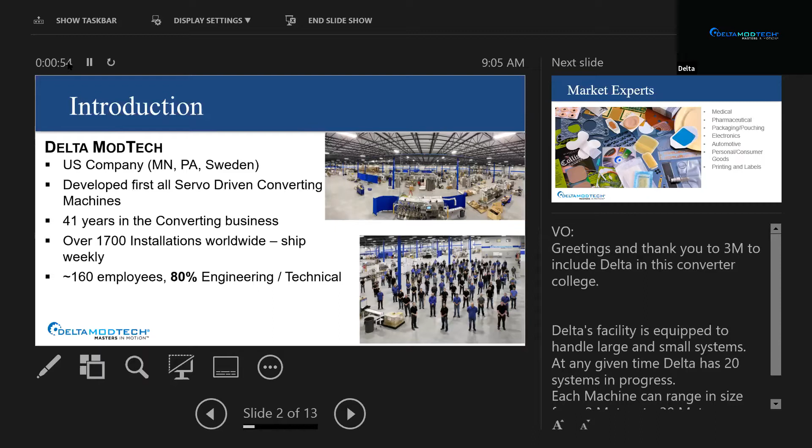These are some of the products. Now, bear in mind that because of the business that we're in, we're not able to disclose some of our customers' most confidential parts. But these are parts that you could find at your local Walmart and things like that. So that's why we were able to display these. But we design machines for the medical, pharmaceutical, packaging industry, electronic industry, automotive industry, and personal goods, printing and labels.

Some of the new emerging industries that have been really fun to be a part of are the fuel cell batteries, as well as some of the medical test strips. We've been involved in medical test strips for a while, pregnancy, blood glucose, and flu. But you can imagine with new pandemics, those experiences expand.

But I'm not here just to tell you today about, sorry, I don't have a good picture of myself, about Delta. I thought it was interesting to share a little bit of my story. When I was going through engineering school, I knew from a very young age. I was 7th grade when I decided I'm going to be that engineer. It was first aerospace based and then biomedical.

But unlike you guys, I just did not have a platform or a vehicle to see if my dream was a reality. And so I sought out mentors, I sought out different people that I could shadow, and really kind of walked in faith that engineering was the right road. I knew I loved math. I knew I loved solving problems. But I just didn't have a vehicle like your robotics teams to flesh that all out and figure out where my strengths were.

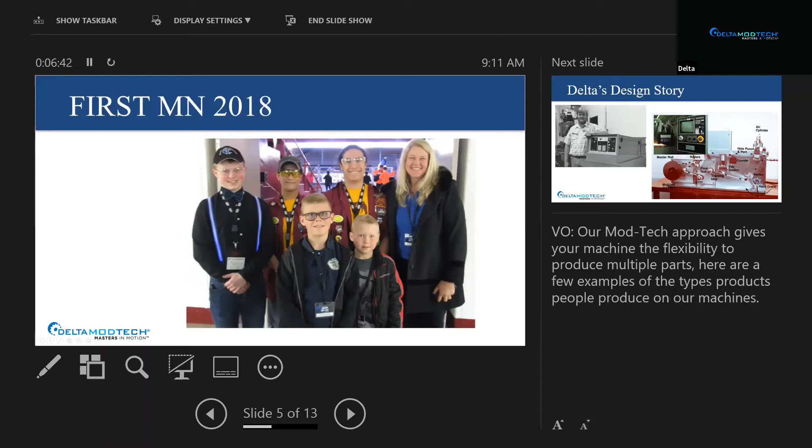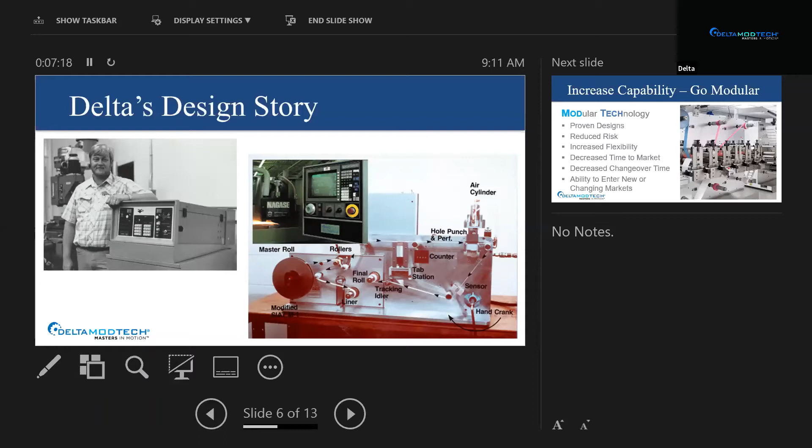And that is really, by the way, the backbone behind my dad's story. I just want to share with you a little bit about how Delta was started because it fits square with what Dean and Mike described. My dad, in 1979, was building and designing machines. And he was doing a one-off approach to every machine. He was innovative. He put servo motors on each of these machines, on each station. But not only was he meeting the customer's problem, he realized he had his own internal problem, and that was this. It's really, really hard and costly to build custom machinery that doesn't have some semblance of modularity to it. So in the 1980s, he set on a quest to develop ModTech, modular technology.

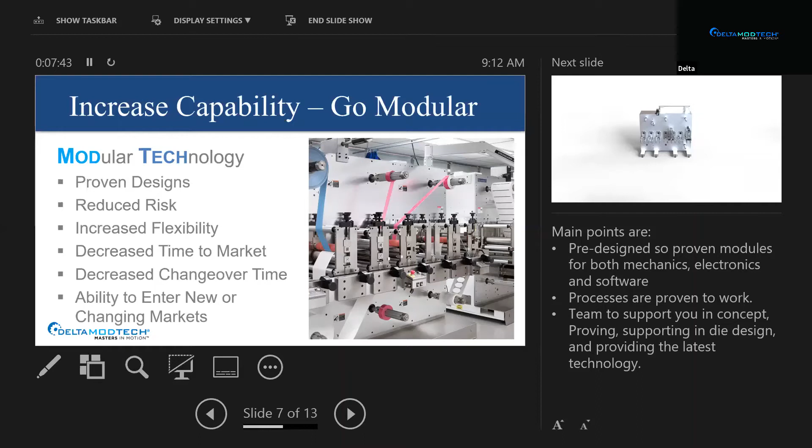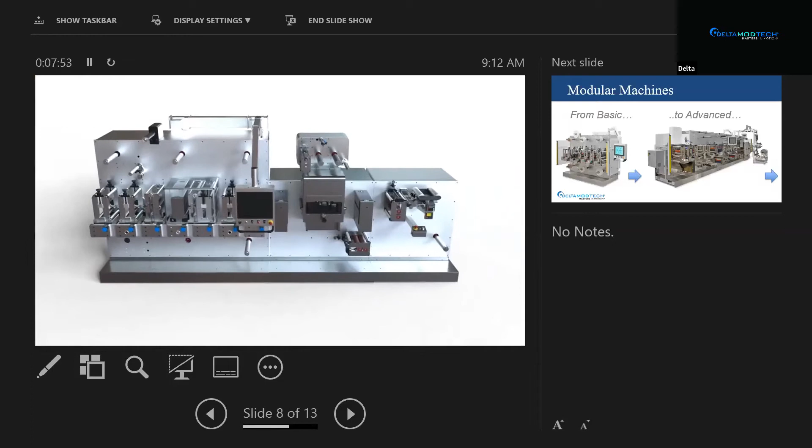Todd's going to go into detail on these modules, but bottom line, what that did for our company was massive. It allowed our mechanical and our electrical engineers to prove their designs and then use those proven modules to build custom machines for our customers. Here's a little quick animation of how that works. It's really like a great big erector set, isn't it? Putting in the proven pieces that we need to make a custom solution.

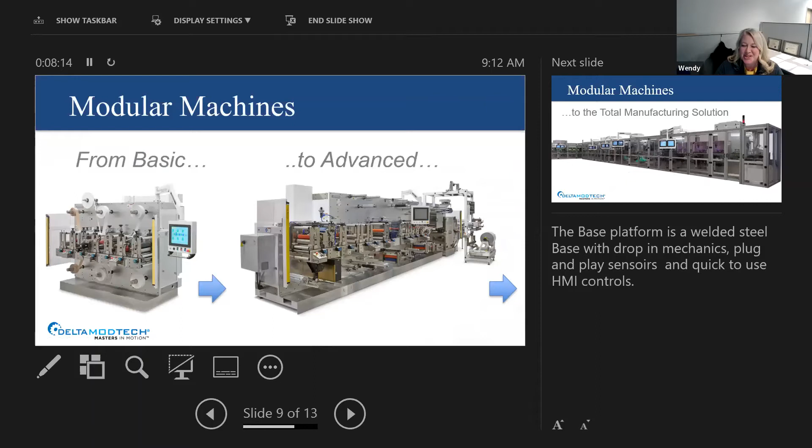Machines range from this very basic machine on the left side to very advanced. And quite frankly, the size of the machine has grown far beyond what this picture is. Full lines. Now, if you could get in the inside of these machines, you would see robotic lines on this end where my mouse is pointing to. You've got several vision systems inspecting and looking at parts through this system.

One other thing, before I hand it over to Todd, that really stood out to me from Dean Kamen's speech, and I wanted to capitalize on it. He talked about failure. And I'll tell you what, if there is anything that I have learned from my dad through the process of watching him in business and innovation, that is, you really have to embrace failure. On the end of your customer, just as Dean explained, failure is not an option. We're not going to fail on our customer's behalf.

But inside of the design process, it is so helpful to run a parallel path when you're designing. And you're going to find this in your teams this next year. Run those parallel paths. Take a risk on some of these things because it's the only way that you will get to market quickest with your product and your solution. And I just really thought Dean did a great job hitting that out of the ballpark. Todd, can we turn back to you in the machine?

Maybe? Yep, we are running. There we are. We here?

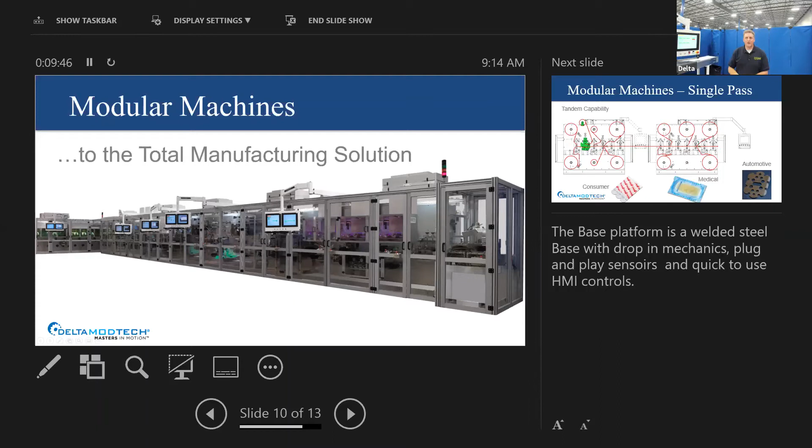All right. Thank you, Wendy. Thanks for the introduction to Delta ModTech, and thanks for all the great years. I've been working here 20 years now, so it's been a long time. And today we're going to be going through the machine design. So I'm going to bring in our coworker, who is also a mentor to a FIRST team.

So just to recap again, I'm Todd Cruz. I'm a Delta electrical engineer here. I've been working here 20 years. And in my spare time, I mentor students in FRC. I started with 3048, originally TNT, on my son's team. I wasn't very involved the first year, and then the second year he got me hooked, and I've been in here ever since.

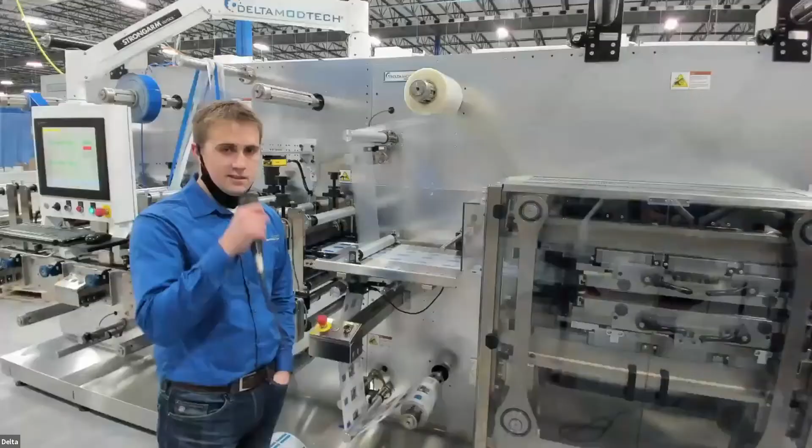So with that, we're going to introduce Chris Haugen. He's going to go through some of the machine design. We're going to tag team as we go through it. So Chris, want to introduce yourself? Sure. Hi, everybody. Like Todd said, I'm Chris Haugen. I've been at Delta not as long as him, more in that 8-year range. I'm a mechanical / design application engineer here at Delta ModTech.

I am and have been for several years now a mentor of Team 2508 Stillwater Armada. I was also a part of that team for my single year as a student within FIRST. That was for Lunacy year back in 2009. So it's been a few years since then, but once I had the opportunity and stability to donate my time back again, I've been helping out my old team.

So in Stronghold year, I was able to have enough time to head back out there and help out, and it's been a great experience ever since. And thanks to Delta for helping out with that and being understanding and supportive of both Todd and myself, helping out younger generations and teaching them some cool stuff. So it sounds like we want to walk through this machine here.

Let's start with the spindles. So this particular machine is a sample of a medical product where it's unwound off of a spindle, a roll of material on the front side. It comes into these stations, into these modules. It gets brought in, controlled, slit into 3 lanes from a single. Then those 3 lanes are spread apart and brought back down to the main product stream, where they're sheeted off at the correct lengths.

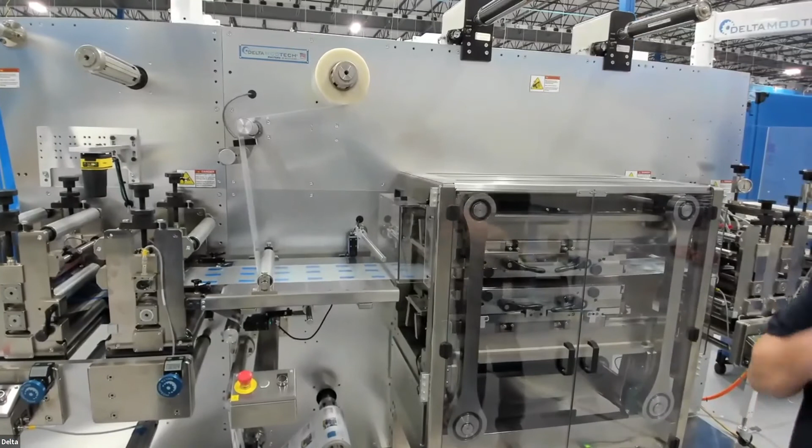This die, so you can see little short sections here, they're being sheeted off. And this material down here is actually the pouch material. So it's being cut directly onto that pouch material. And then after that's placed, we bring in a clear layer of pouch material on top to complete that.

So let me interject a little bit here, Chris. On our machines, since everything is servo driven, it can switch directions at any time. So we can go forward, we can reverse, and that's all through our HMI control. So in the spindles, it doesn't matter if the material comes wound clockwise or counterclockwise. We're able to put it on the machine and change the direction where we need to.

Same with each one of these servo nips. We have nips, or a sheeter die that can cut the product, but all these are reversible. You can go forward, you can go reverse, just like switching it. It's kind of like driving your robot. You have your joystick, but instead of a joystick, we have to program using our HMI.

One thing I also want to point out is there's vision tracking on a lot of robots. Here, we've been using Cognex cameras for a lot of our vision systems. We use these a lot on tight tolerance or critical dimensions that we want to do online processing with. What this camera would do is take the width of this material and feed back to the system to tell us how well we're slitting that material.

Or we could take it over here on the pouch stock, and when the part comes in here, we can look at it and do the dimensions of this part. There's just a little rectangle here. Most of the time it's very complex parts we run on these machines, but we can do dimensions on here and feed back to the die station and say, hey, you're too long, you're too short. And we can auto correct the machine for that.

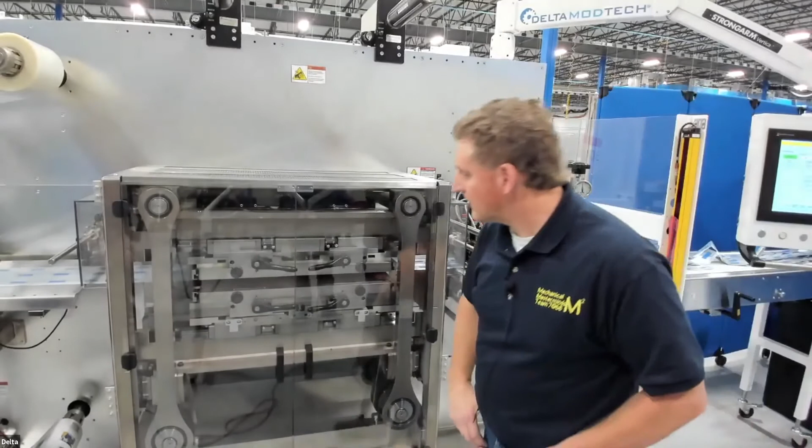So guys, it looks like our parts are not in register. I can see that in the camera, but typically that's a really big design input that we have to address. What type of tolerances do you typically want to be holding on this type of medical product? It's a bit of a tough question because it definitely varies from one product to the next. In this case, we're really just trying to make sure the part is actually in that pouch. So if Todd grabs the pouches from down there.

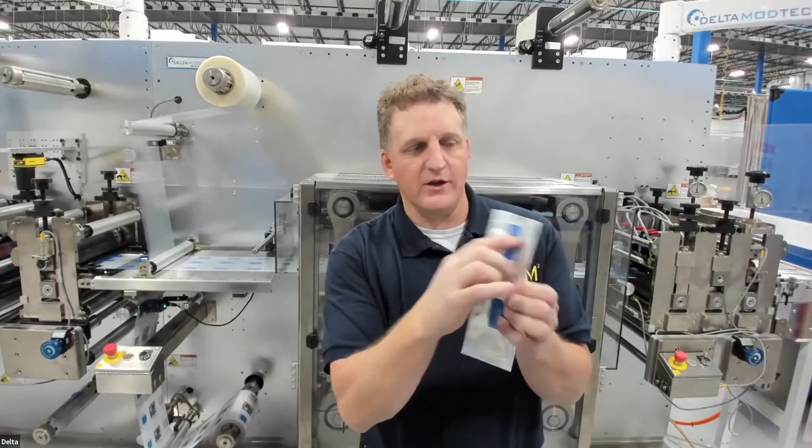Right now, what we're seeing is this blue part here is not in the seal window. It's actually on the top, so that would be a reject. We would reject it off the line at that point. So our goal when we're cutting it off the sheeter die and placing it on here is that we have sensor feedback continually feeding back into the system to hold this part in the center of the seal. You can see there's a chevron type of seal on here.

Usually it's not a big problem, because the inside part relative to the pouch stock is quite a big difference, right? There's a lot of room for this part to move around, side to side, cross web we call it, or up and down web, which is the lengthwise of the pouch. So as operators setting these up, we'll have to go in and adjust the registration on the screen manually.

To give you a little more information about how the registration works, see this die here, and I don't know if you got it zoomed in pretty good. Right here's a cam, and there's a sensor on here for feedback. On robots, my students know this quite well, when you want to do a manipulator actuator, what's the first thing we do? Come on, Nate, back there. We home it, right? We have to home it, we have to reference it.

Once we home that, we can do the calculation and know exactly where this die is, how many rounds it is, when we put in a pre-programmed part length to get us close, right? So it references that. From that, we can feed in sensors to reference the die and move it up and down web. We can't do cross web because this die only runs in one direction, right? So if we wanted to move it in cross web, how would we do that, Chris? If I was off in the cross web, how would I do that?

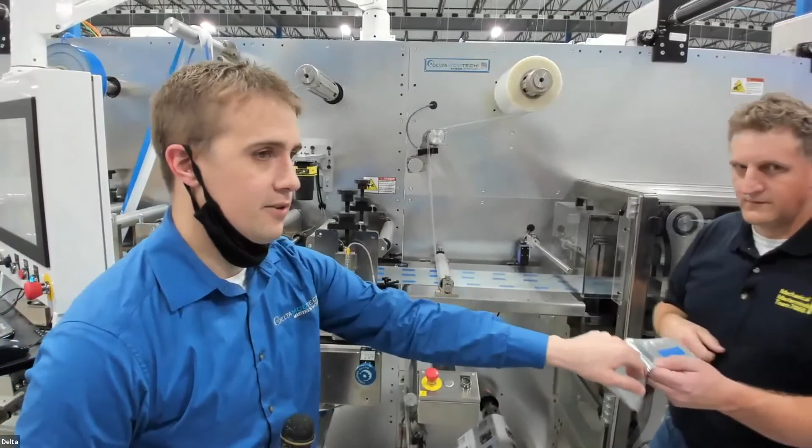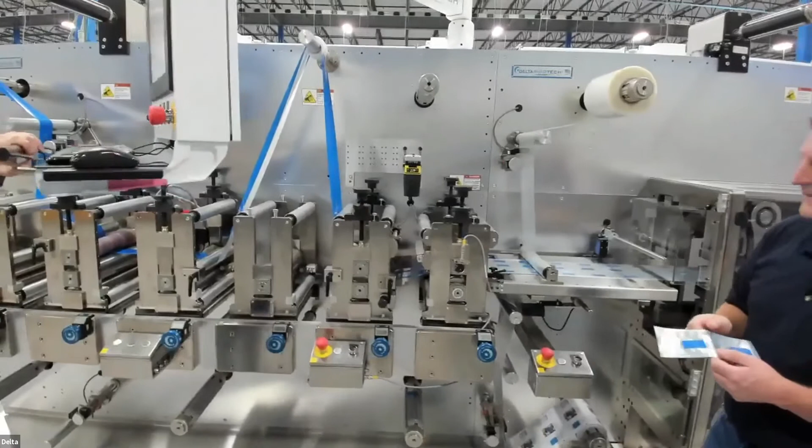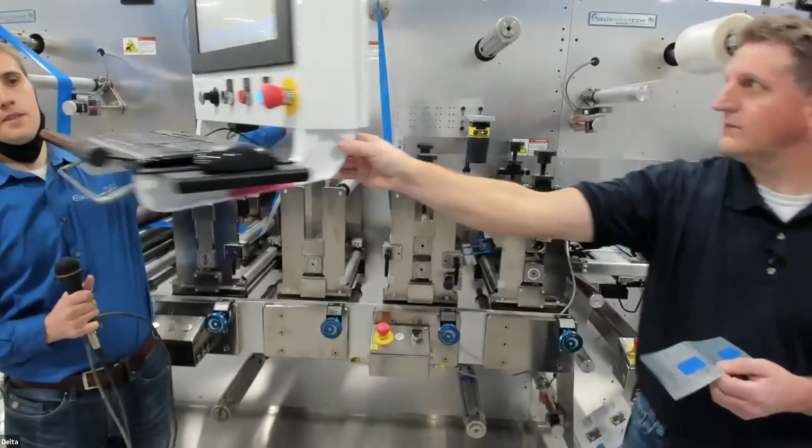Either you could actuate the whole station in and out if it was cutting out the whole die. In this case, it's only sheeting out the front or back, right? So you really can't change the width using this tool. So you'd come back here and look at the slitter die, which is slitting it from that single lane to several lanes, and we may adjust the location of those blades, or adjust the guide rings that are guiding the material to their final locations.

Perfect. So as we come down the line, then we can do our adjustments. We can have vision feedback on there if we would desire. We got the slitting knives. So when we're running process, a lot of things can happen, just like in our robots, right? Things break, things take down. Typically our deltas don't break, inside joke. But we are very robust in what we do with our setup on our die stations and everything, and how we move it through the nips and stuff. It's nip pressures. We have a lot of knobs on here to adjust things.

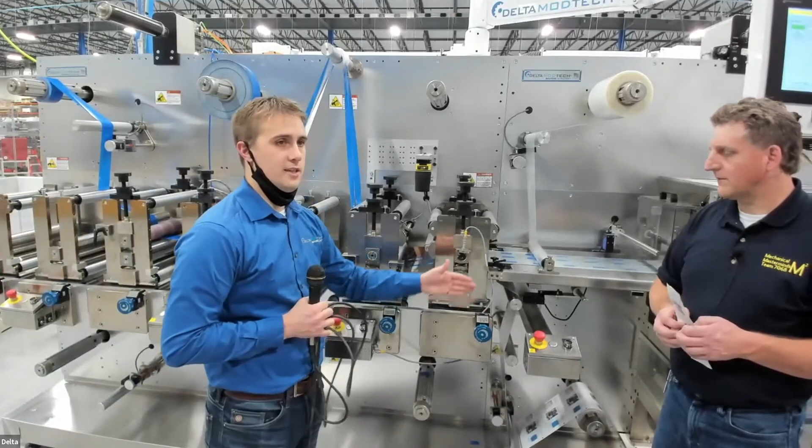Like Chris mentioned, there's a cross on here. You can dial the station in and out, especially if you had an engraved die station, right? So this is a sheeter blade. What's the difference between a sheeter blade and an engraved die setup, Chris? The sheeter is just a straight one blade where it's cutting it off to length, versus an engraved, you're cutting the full geometry of maybe a circle, right? Cutting that whole circular shape. So if you want to adjust that in the crossweb direction, changing this knob, moving that station in and out with that die in it makes those adjustments.

Right. So if we come back down the rest of the machine here, we have what's called the packaging side of it with the heat seal. So these two plates here are heated up to a temperature, and it has this engraved embossing engraved into the plate. Chris can explain it better than I can, because I'm an electrical engineer, but there's a machined out plate that has the chevron on here and this impression. And so what we use is temperature and air pressure on them plates as it comes down.

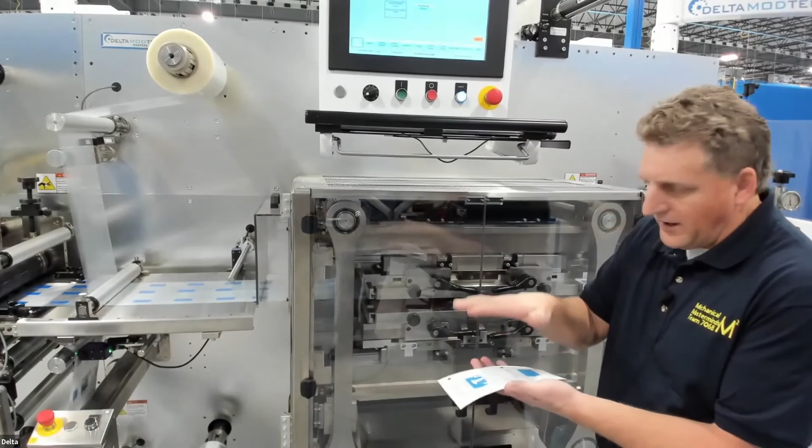And it squeezes it, and what it does is what we call hitch on, and then it rides with it. So if I jog a little bit, you'll see what I mean. It comes back, it closes, and then it rides with it. So we're matching speed. Anytime we're doing robotics, when one of our drivetrain wheels is slipping, what happens to the robot? It drives sideways or crooked or turns all the time, right? Here we have to do what's called a programmable cam that will go back in timing with registration, because there's eye marks on here.

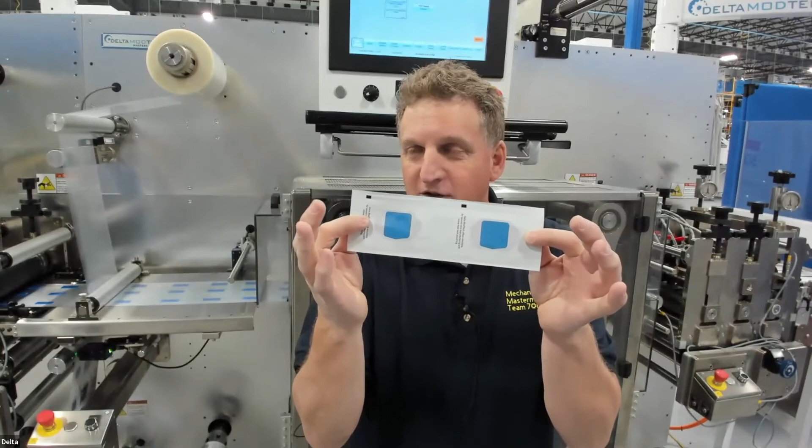Does anyone know what these eye marks are on the pouch stock you see all the time? When you get these types of packaging, does anyone know what that eye mark is? You think this is part of the graphics? Anyone know what that's used for? Being in this industry so long, I always look at the eye marks now, because you know why? That's usually an indicator of how well the machine is run. That's our registration mark. Either we'll have it offset, or a lot of times we will cut that and break that eye mark.

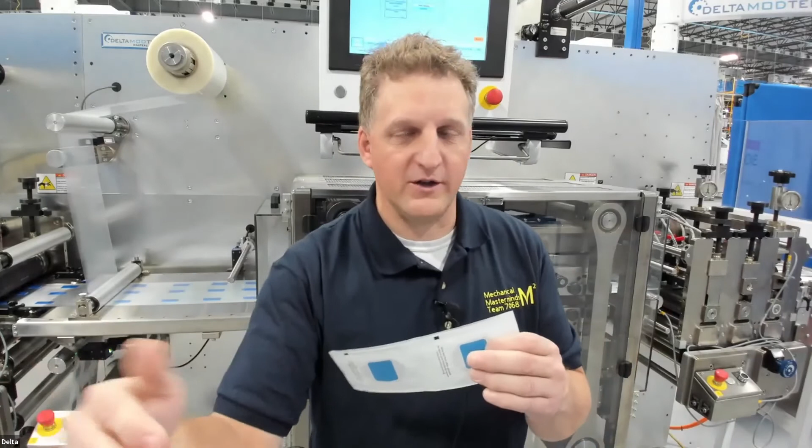So in robotics, what do we use that for? Sensing distance or a certain move on the mechanical setup of your actuators, manipulators, whatever you have on there. We would use a sensor to move it to a location. Same thing in what we do here at Delta. We're moving it to a location.

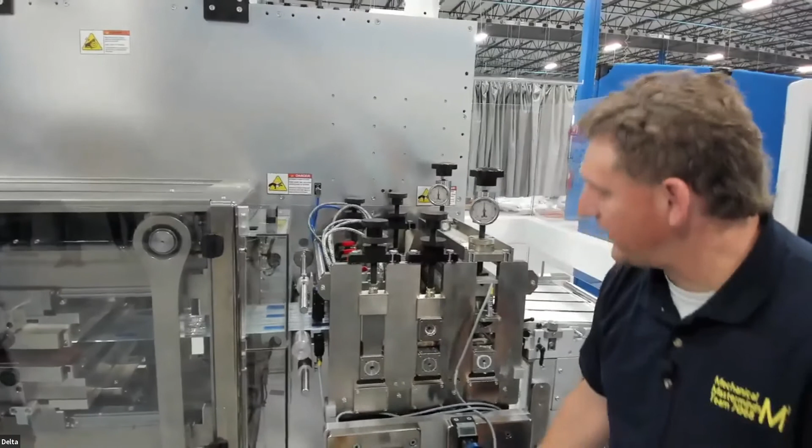So on the steel bed here, and then down here we have sheeter knives that will sheet the part off, and then we have what's called slitter knives down here as well. And these are all air driven up and down that will trim it off. Sometimes we trim off the edge of the pouch stock and vacuum it away, or rewind it, and then it will slit in individual lanes. And you can see this is not cut quite right, and then usually a part gets jammed in there.

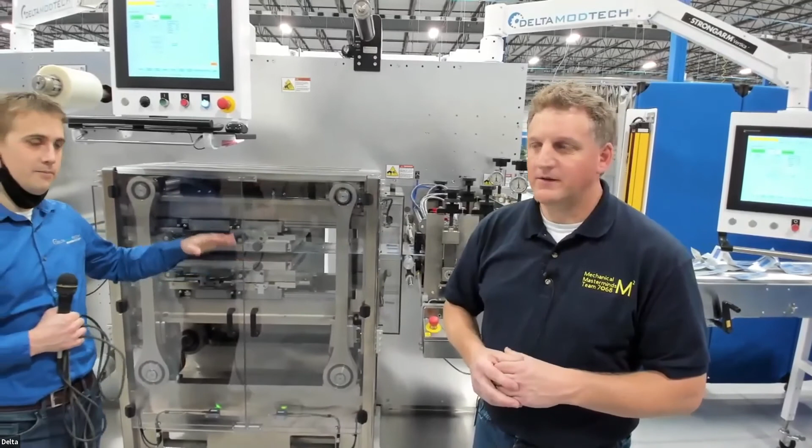And last question that I'll ask is, what is the maximum throughput of a machine like this? And again, I'll let Todd kind of answer that, but it really is dependent on the customer's product and the quality verification that they're trying to achieve. Right. Yeah, and this flat steel bed's designed for 100 feet a minute, right, Chris? Somewhere around that. I mean, it all depends on how long does it need to stay closed with the material. If I put in a 10-second dwell time, it's going to get slower than if I can do it in a quarter of a second.

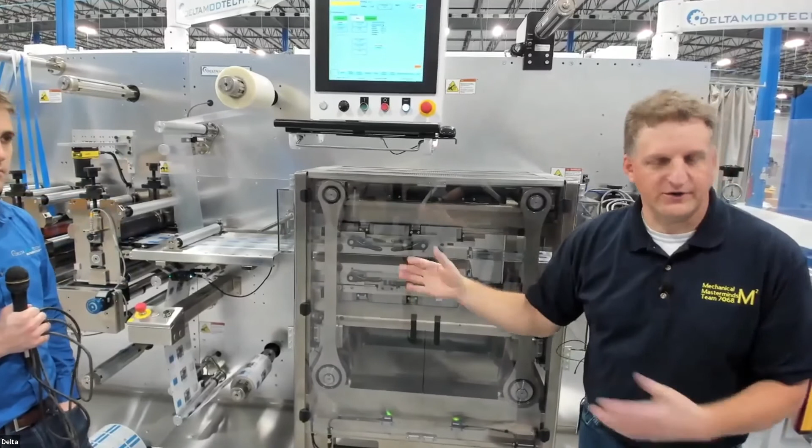So what happens in there in the software, we won't go into a lot of detail, but if you put a longer dwell time, which means how long it stays closed, because it could come up before it reaches the end of travel, we will automatically open it up and return it. So then it won't be sealed well. But we also have flags in there to tell you speed limiting. It won't let you do that as well, because it takes a while to train operators on all these little settings in here. But it all depends on the part size, really.

I mean, it's a hard question for us to answer, because if you have a bigger part blank, you can do a lot more parts. You do smaller ones and you got them bunched together, it changes the thing. Our converters, our base machine, can run up to 300 feet a minute right off the floor. We've done faster machines, but that's what they're designed to do.

So we're running out of time, which is unfortunate because we'd like to keep going with this. So the last thing we wanted to do was bring Eric Maroney in. He's alumni. Where's Eric? Eric, come over here. Hello, Todd. Hello, Eric. Eric, why don't you tell us a little bit about yourself? We first met as the rookie team of 7068, and now here we are today. Sure. So my name is Eric Maroney. I graduated in 2018 from St. Francis High School, Team 7068. I am currently attending the University of St. Thomas for mechanical engineering, and I'm a junior.

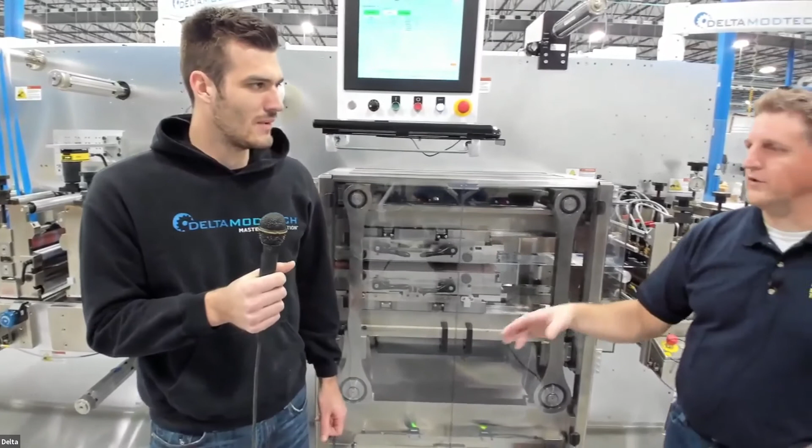So just tell us about your experience here as an intern and what FIRST has done to help you with that. Sure. So FIRST Robotics has been very beneficial in many aspects. You get a lot of team building skills, a lot of engineering skills, a lot of troubleshooting techniques I learned. But another really important thing about FIRST is the connections that you make. For example, I met Todd, and thanks to that, I have a wonderful internship. So yeah, it's definitely an awesome experience.

Yeah, we're excited to have you here at Delta. You're a junior now, and so in a couple years you'll be graduated, and I'm sure the door's gonna be open here for you to work here full time. And so we enjoyed it, and it's fun for me as a mentor to see this type of growth. You see him as a student, what they contribute to building the robot, and now what he's doing in the workforce. And this is what this demo is all about.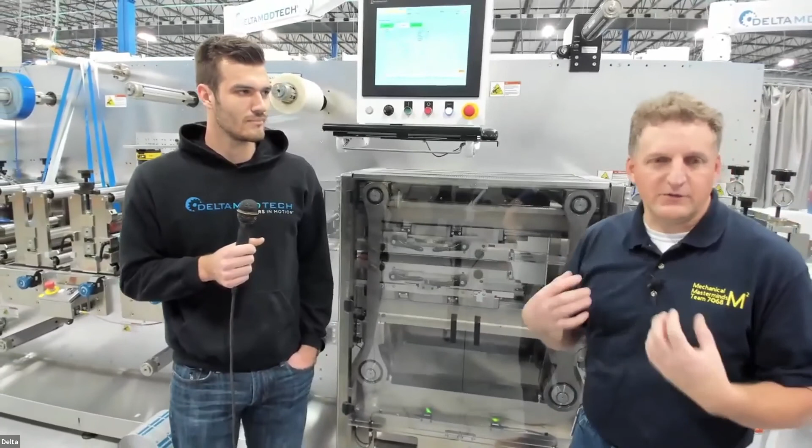We want to bring industry a little bit differently, and instead of just giving you sessions about robotics and controls and marketing stuff and SWOT analysis, all that stuff plays a role in what we do here at Delta. And so we're super excited again that we were able to do this here.